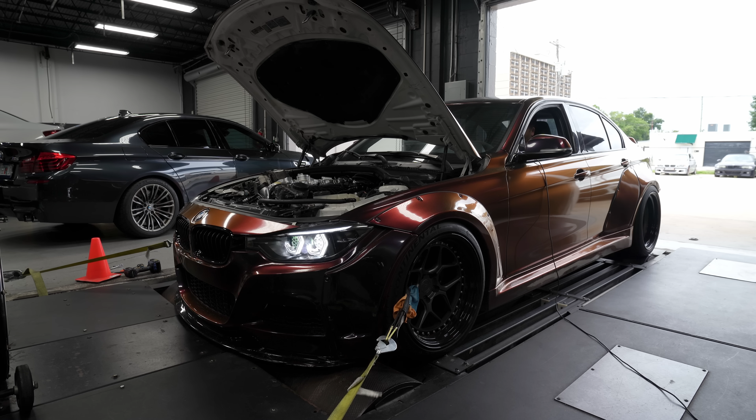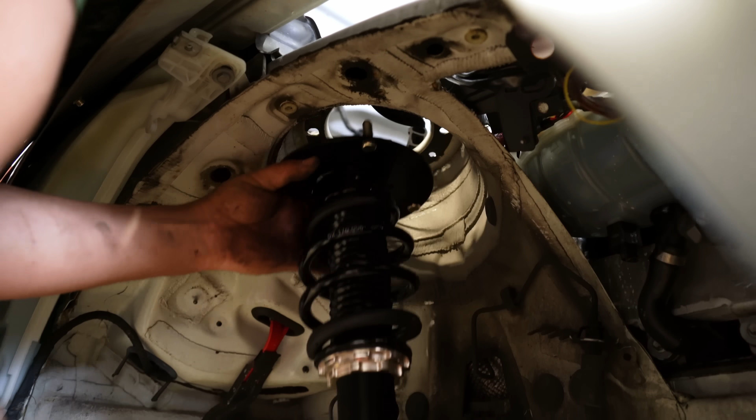My F30 335 has gone from being an absolute clapped mess to a straight up monster, both in the looks department and today in the performance department as we try to make as much power as possible. After tackling all the maintenance on the car and making this thing as reliable as possible, I focused on making it look good. The suspension, the body kit, the wheels, the wrap, the headlights, the taillights, the interior. The combination made for one amazing looking show car.

Sure, it looked aggressive, but I needed it to perform aggressively as well. So we jumped into performance, to prove that the N55 is just as capable of making power, something that most people tend to disagree on.

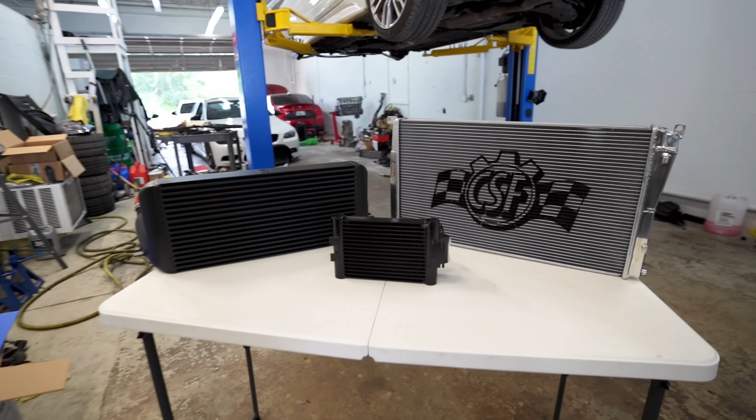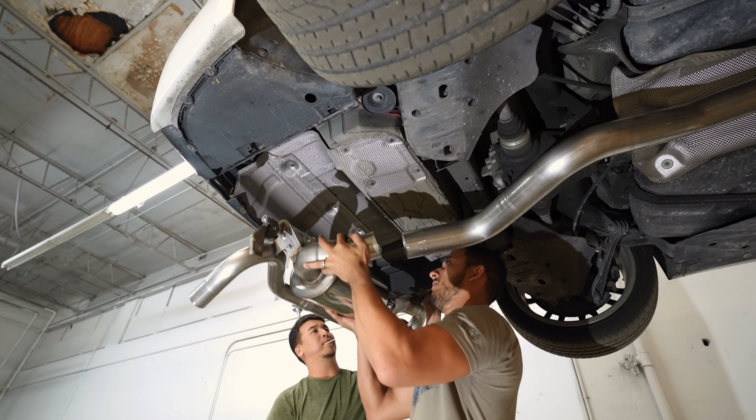We first started with cooling upgrades to help support the amount of power we were going to make in the future. Then we moved on to the exhaust system. I went with one of the best options for the F30 N55, a catback exhaust from AWE, which sounded absolutely amazing.

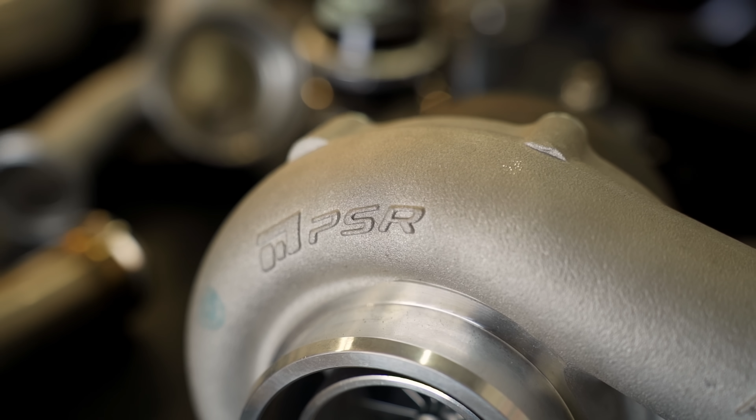Next was the turbo upgrade. The N55 PWG is garbage. I wanted to bypass that setup, so I decided to go with a big turbo upgrade from SpeedTech. The install was challenging, especially for an F30 with the M Sport package, but the first start was totally worth it.

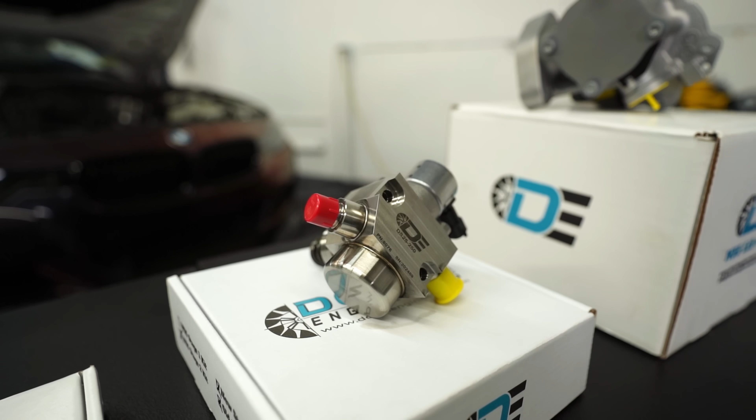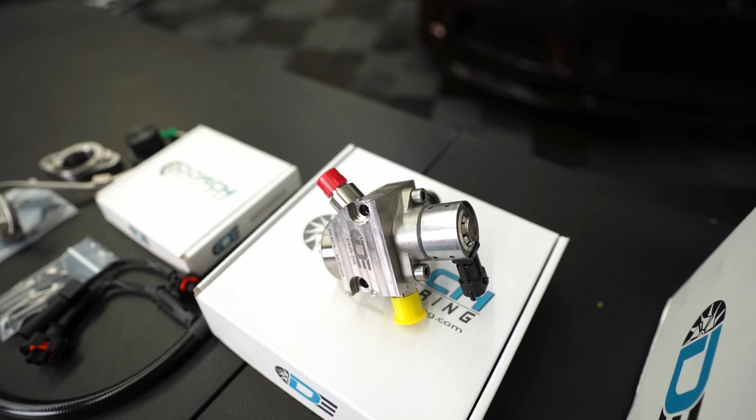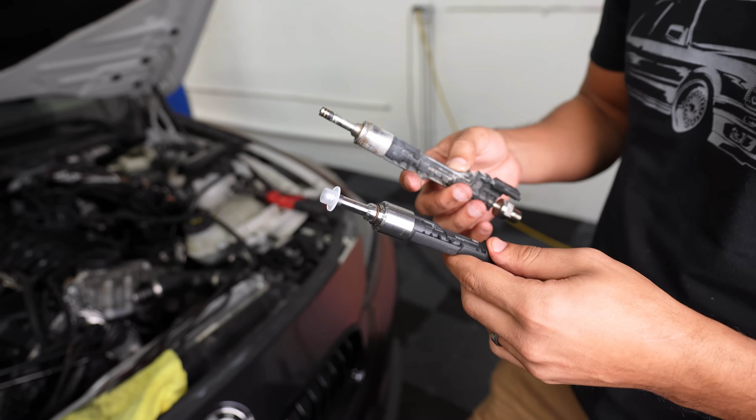We finished up performance with fueling upgrades. I was told that the car could make big power without having to deal with port injection. Now that got my interest. We installed two key upgrades from Dorch Engineering: their DS25 high pressure fuel pump upgrade and their lift kit to go with it. The F30 also got a Precision Raceworks Stage 3 low pressure fuel pump upgrade along with upgraded fuel lines, flex fuel, EU5 injectors from the S63 engine, and a low pressure sensor so we can log future tunes accordingly. And now it was time to party and make some good power.

My goal? 600 wheel horsepower.

Alright, so we've made it to this point guys. I believe the F30 335 build is finally complete and she's ready to be given away.

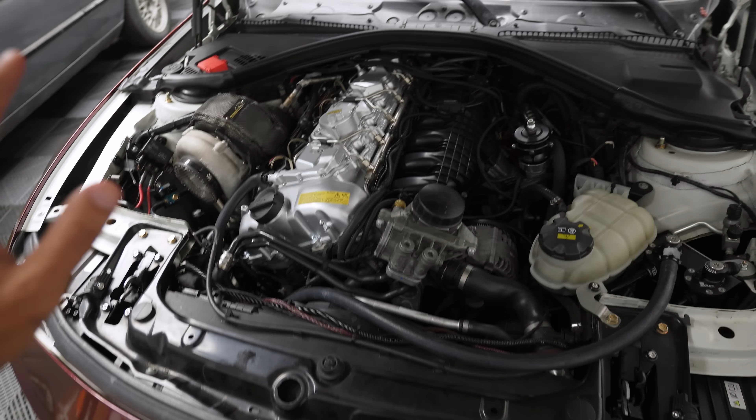A little bit of a mess here, so we do gotta organize this before somebody wins this car. Beauty cover is gonna sit on top. I've been rocking this Amazon cheap metal valve cover, so far pretty good, under 24 PSI, so not bad at all. But yeah, she's ready to go.

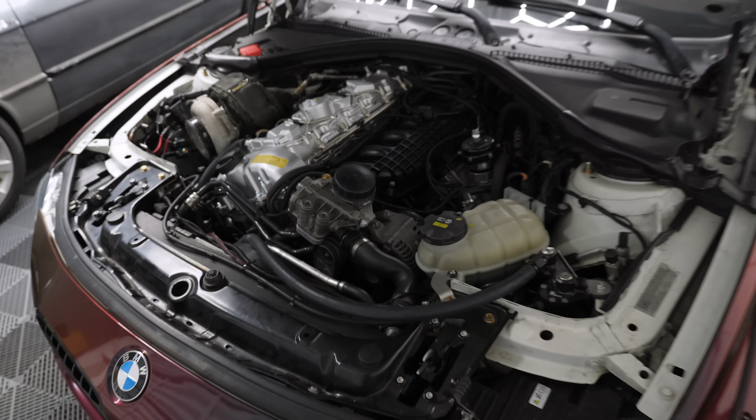She's healthy. So all we gotta do is load up the last custom 2 file, take the car for a drive, make sure she drives okay, make sure she's extra saucy. And later on in the video, we'll take the car to the dyno and see if we can get to that 600 horsepower we've been trying to get to.

We'll be using the MHD app to flash the car. This is a very cool platform. It's very user-friendly. You can do it at home, and they offer so many features for these cars.

And to communicate the app to the car, we have the MHD universal adapter. This is my favorite go-to adapter. We sell a ton of these. In fact, this is our number one selling product on the website. It's very fast, super reliable. It does work on BMW E, F, G chassis, and it also works on the A90, A91 Supra.

Flash custom map. All right, so the latest revision is this one. Let's go ahead and select the options. So I'll show you guys what I'm running as far as settings. For the CAN bus ECA, we have Motiv ReFlex. Anti-lag is activated, but I have not tried it on the F30. I've tried it on the M2, but not on the F30, so maybe we'll try that out today.

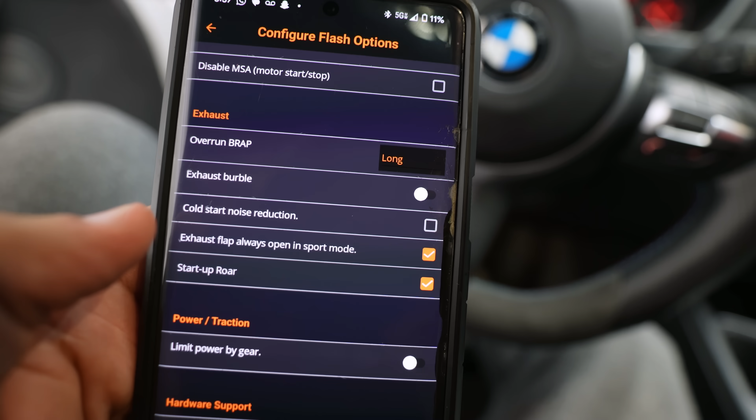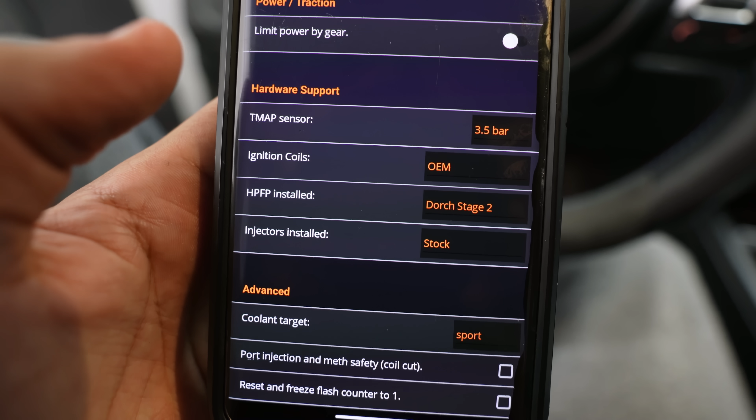MHD Plus controls are activated as well, which adds so many cool features to F and G series cars, like map switching, anti-lag, no lift shift, and stuff like that. Aftermarket down pipes, the overrun brap - I never really activated that, but I guess you can change it. Let's do the long braps between shifts, and exhaust burbles disabled because I'm not a big fan of burbles. I did enable startup roar because it's cool, sounds awesome. Ignition coils OEM, high pressure fuel pump, Dorch Stage 2 Plus, which makes this DI only build possible. So if you guys haven't checked out the video on the Dorch Engineering products I put on the F30 to make this all work, make sure and check that out.

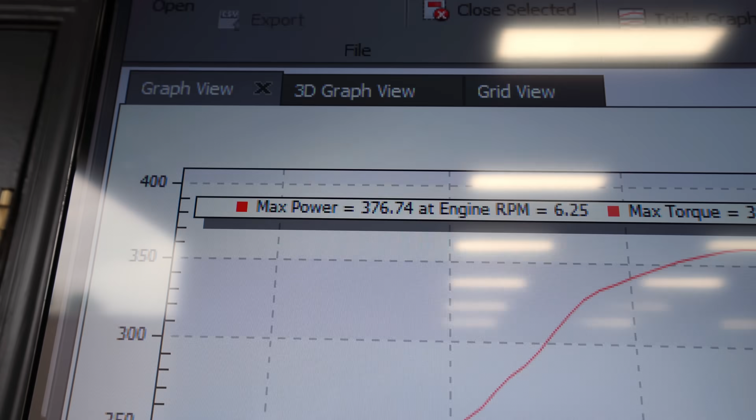We know for a fact the car is not supposed to be making 376 horsepower and 366 pound-feet of torque. Fuck that. And of course, the F30 gave us just one more reliability issue to take care of before continuing to have a little bit of fun.

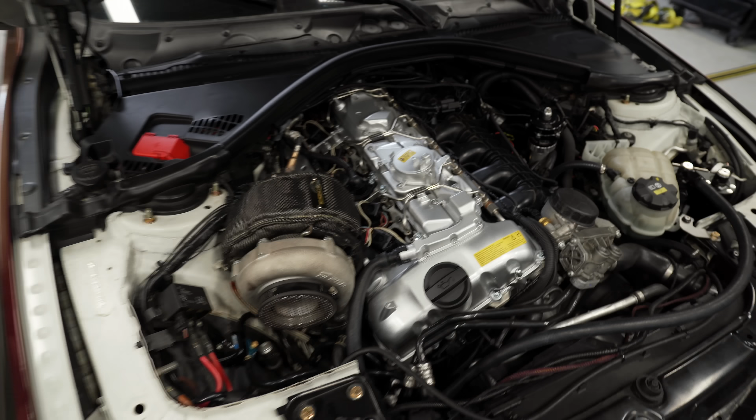The car had a boost leak. I logged the run with MHD and you can see that the boost was peaking at 10 PSI, which is not what it's supposed to be pushing. The X3M, no problemos. M2, no problemos. F30, problem first pull. Sick.

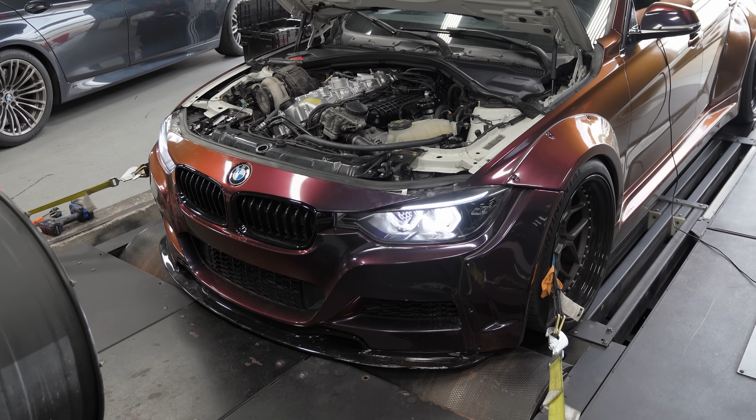Not bad for the first official run. 574 wheel horsepower and 569 pound-feet of torque. That's a pretty good start.

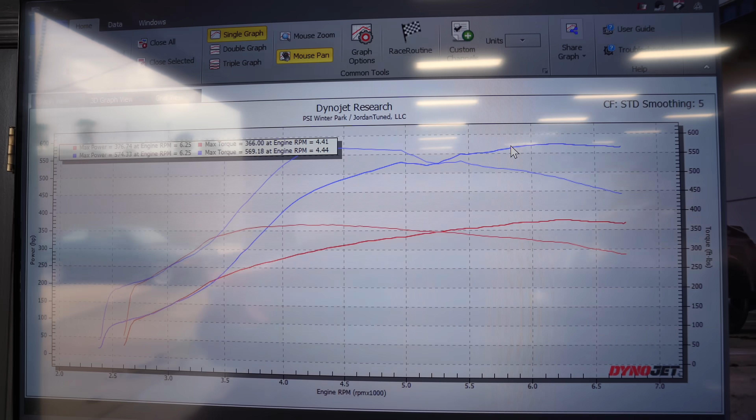But my tuner knew we could do better with a few tweaks. Plus there was a weird dip on the dyno graph that we were trying to iron out. There we go, tune successfully flashed to the DME. But now we just gotta wait 30 seconds and we'll be right back up.

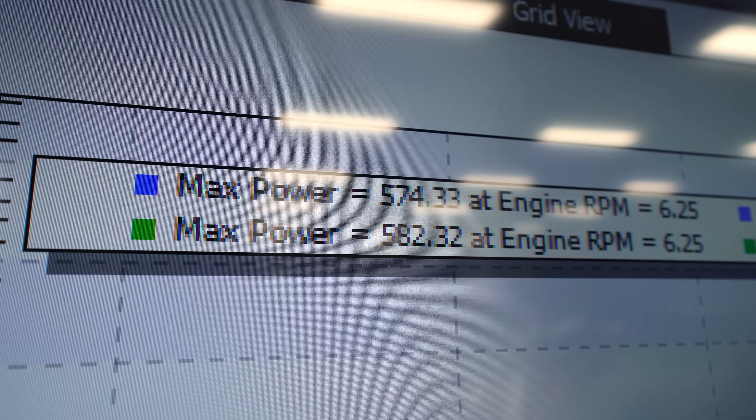For the second run, power was trending upwards. We got up to 582 horsepower and 581 torque. It was time for another tune revision and another dyno pull.

All right guys, so it looks like we're getting the final revision. Probably gonna be the last pull, just because I don't want to overrun this car, especially because I want to preserve it for the giveaway, and hopefully we make more power. It's definitely gonna run a little bit cleaner. David Shoup told me that it was running with a little bit too much fuel, so we pulled 6-7% of fuel out. So let's see what she does.

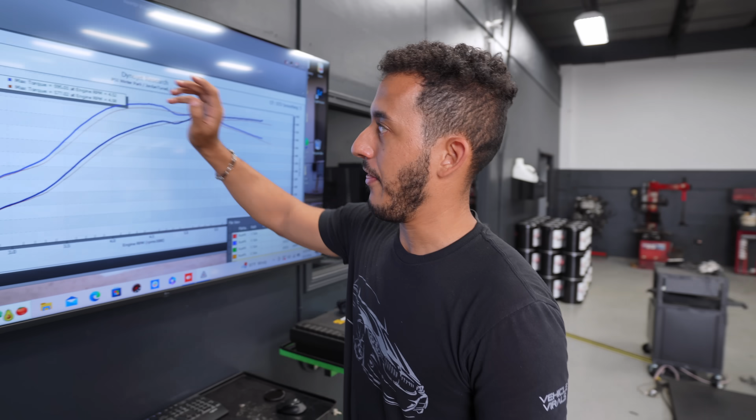Guys, so we just did the last run. That one yielded 582 horsepower to 577 torque. The biggest difference being how smooth the graph is. David Shoup did some adjustments to the injectors, the EU5 injectors that I have. So once we did that, it cleaned everything up.

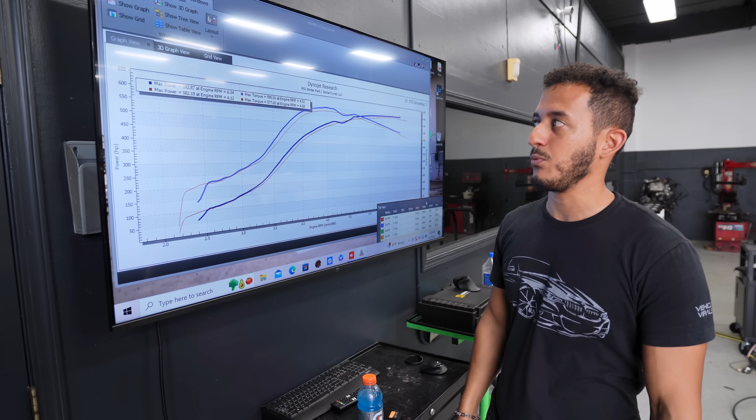Obviously it's like the 4th or 5th run we've done on the dyno, so the car's a little bit heat soaking right now, which is probably why I didn't make as much as the last pull. 582 is still not bad. 577, it's a really good, I would say, safe power for the N55 and F30. So that's where I'm gonna keep it at.

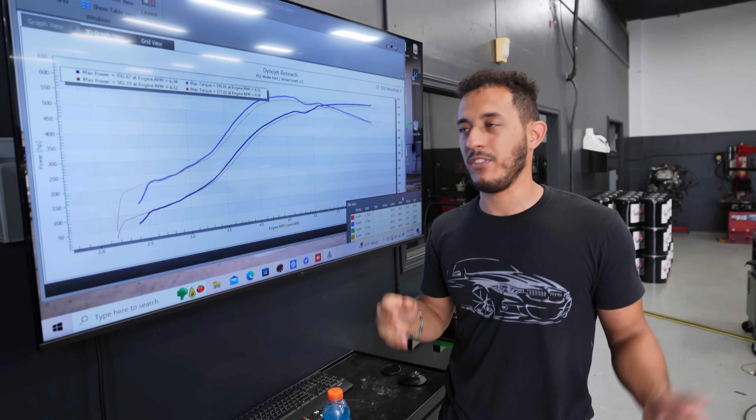Technically, I can probably keep tweaking the settings with David. I don't want to take a chance that something horribly goes wrong. Plus the car's running really good right now, so I'm gonna leave it like that. So yeah, 582 wheel, 577 torque. I'm happy with those results.

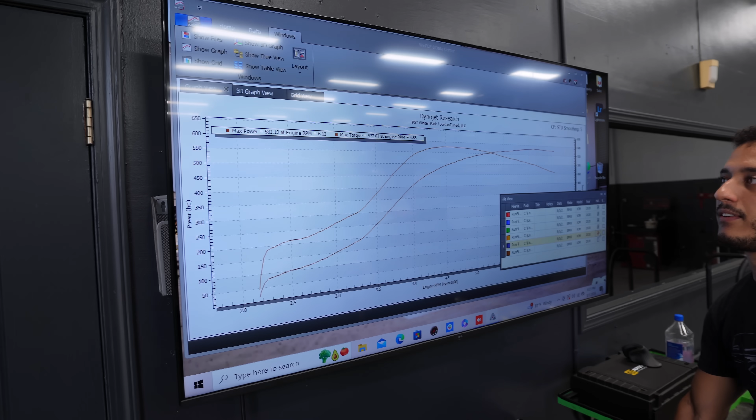You get me with the giveaway. He comes as an add-on. He's the DLC pack for the F30. We'll take 20. This car will change somebody's life. I'm not talking about that. I'm talking about, I don't come with the purchase. Yes, you do. I thought we agreed on that. For legal reasons, we are not doing this. Oh, portable mechanic, just stuff them in the trunk. Bullshit, you better pay me.

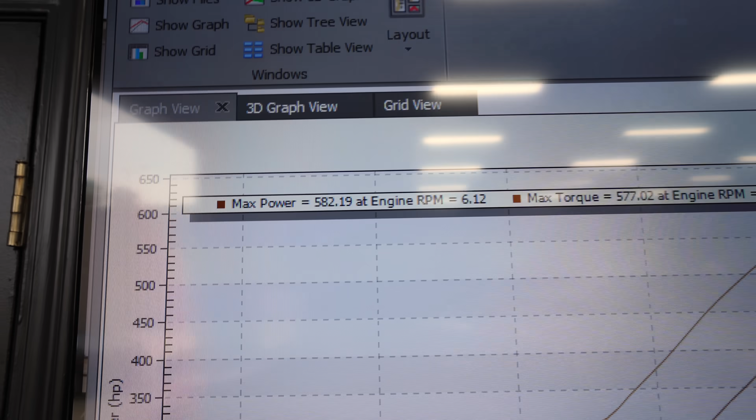I'm not really bummed out that we didn't reach 600 horsepower for a few reasons. The 3-port MAC solenoid and the turbo were pretty much maxed out, and we were running at like 90% wastegate duty cycle. Slap on a 4-port and/or a bigger turbo and 600 horsepower would be super easy.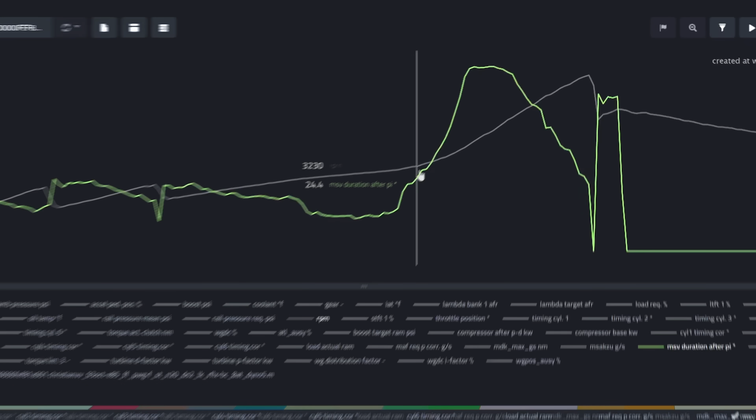Plus, take a look at this data log parameter. MSV duration after PI. Essentially, it's the high pressure fuel pump duty cycle. It's a number that ranges from 0 to 126. So not only did I make nearly 600 wheel horsepower, but just look at how much headroom the car has left in terms of fueling. I am totally sold on DI only at this point.